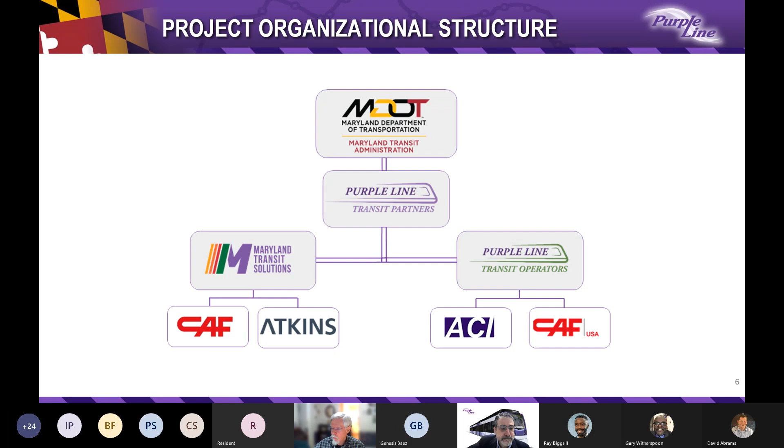Well, let's go to the next slide and take a look at the revised project schedule.

The new design build contract was executed in April. During the spring, MTS engaged in its mobilization efforts, signing subcontracts, planning field activities, and performing due diligence inspections in the field. MTS construction activities ramped up over the summer, and active Purple Line construction can be seen across the entire alignment, as I'm sure most of you are aware.

With all the work plowing ahead, we look forward to our light rail vehicles starting to arrive at the new Glen Ridge Operations and Maintenance Facility off of Veterans Parkway later this year. The test track area, centered around the Glen Ridge facility, is scheduled for completion in summer 2024, which will kick off a period of intensive local testing, integrated testing, and initial operator training while construction continues elsewhere along the alignment. In winter 2025, construction across the entire alignment will have progressed enough to allow for system-wide testing, full operational training, and the commissioning activities necessary to prove out a safe and ready light rail line.

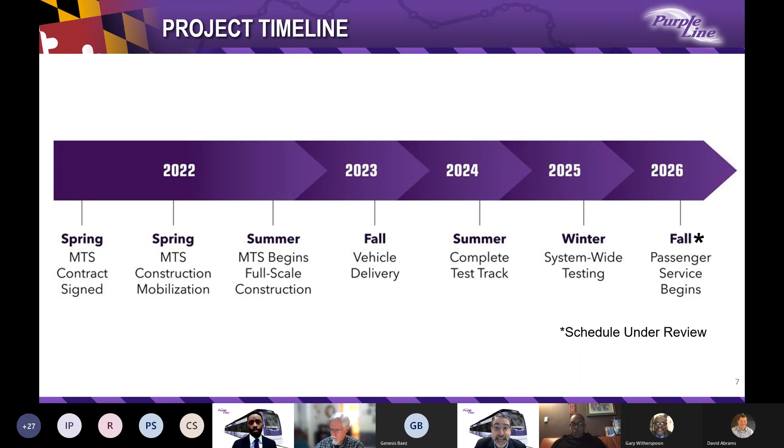With that, I will turn the microphone over now to my project director, Ray Biggs. Some of you may not have met Ray yet, and I'm pleased to have Ray on the team. As project director, Ray is the state's representative responsible for the day-to-day design and construction activities on the Purple Line.

Thank you, Matt. As Gary and Matt mentioned, for this evening we will focus on construction along University Boulevard between the Takoma-Langley and Adelphi Road, UMGC, UMD stations, which includes Riggs Road.

The project will enhance pedestrian safety around each station with ADA-compliant crosswalks and upgraded signals to include pedestrian countdowns, enabling pedestrians to safely cross University Boulevard.

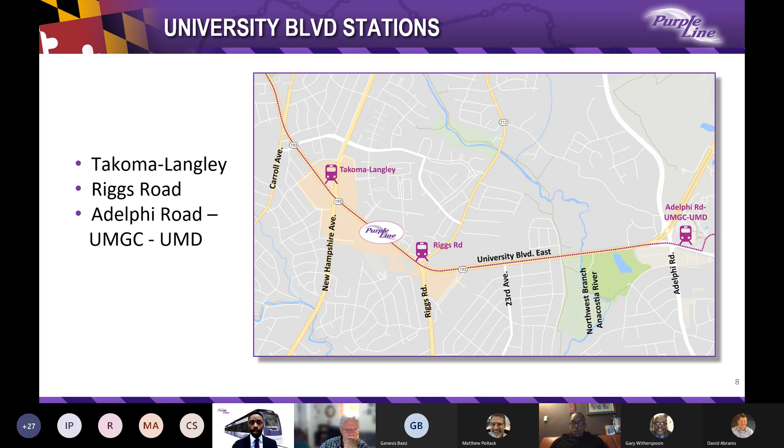Each of our stations will feature unique art installations, benches, trash bins, and message boards providing train arrival and departure information. Over the next few slides, we will show you renderings and designs for each station, as you can see here.

In this segment, you will see a locator map to the left, identifying where the station will be located on University Boulevard. On the right side, this is an engineering plan that highlights design features about the station, including the lighting, shelters, catenary pole location, and fencing surrounding the station.

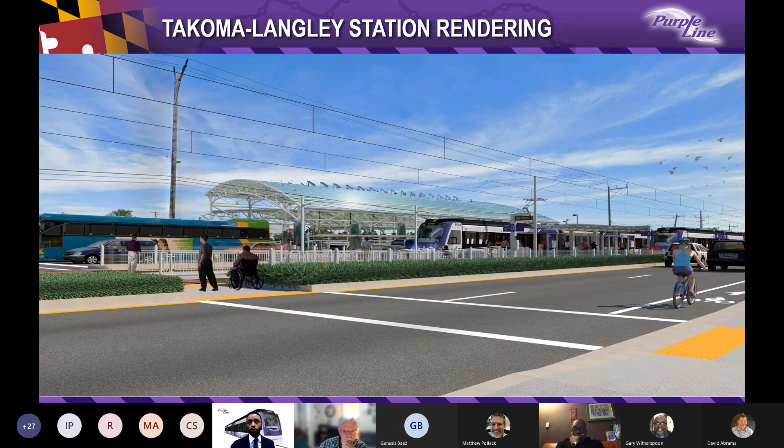Moving on to the Takoma-Langley station, across from Takoma-Langley Transit Center, just west of New Hampshire Avenue. This rendering shows you where that transit center is. This station allows riders to have easy access to the transit hub, connecting riders to local and regional bus services or shopping at the diverse options of shops and restaurants in the area.

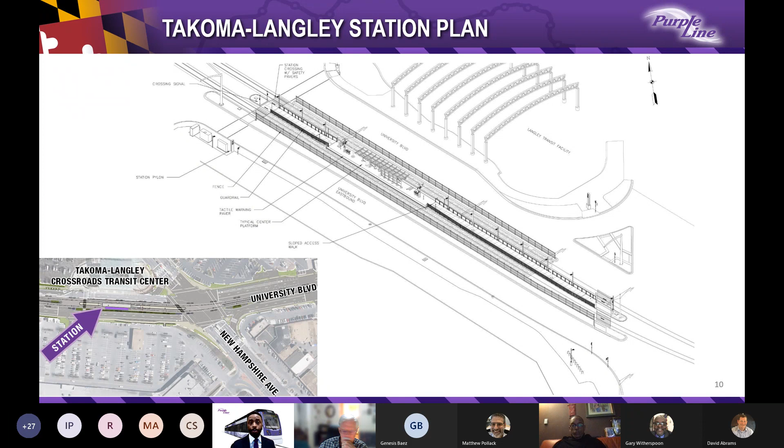Moving on to the next slide. Each of these three stations will be center platforms, meaning our alignment runs down the center of University Boulevard. Because of this, you will hear about our plans to widen the roadway to make room for the light rail and center lanes in our upcoming work. This slide features the details for Takoma-Langley Station.

This rendering shows what a center platform station will look like, typical along the alignment. You'll notice the station shelter is in the middle with train tracks on either side, while the area around the rendering shows grass. University Boulevard will be the roadway with sidewalks on either side of the station, not the grass area on the right side of the rendering.

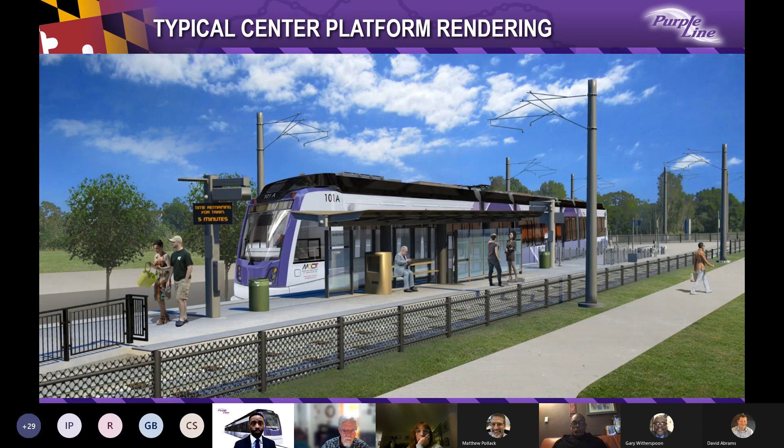That brings us to the Riggs Road station, which is just west of Riggs Road on University Boulevard, with plenty of shopping opportunities and communities off University Boulevard.

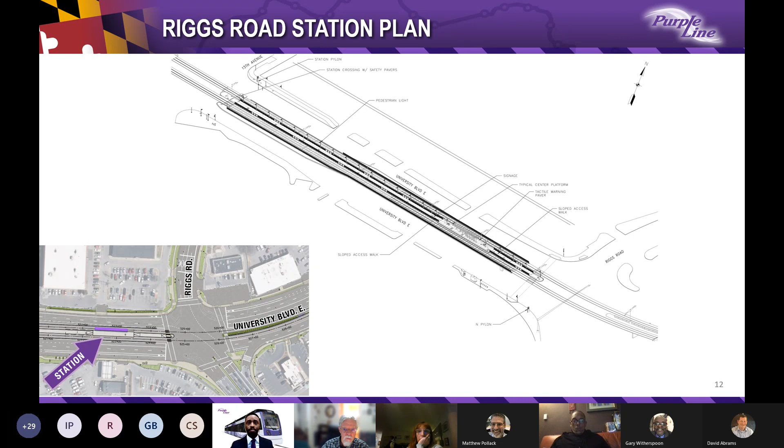The Adelphi Road UMGC UMD station is one of the 5 stations where University of Maryland faculty and students will be able to ride for free. This station is located at the western point of Campus Drive, adjacent to Adelphi Road. Riders will be able to walk to residential communities, the University of Maryland Global Campus, or continue to University of Maryland from this stop. Now we'll turn it over to Yago Pernas, the construction manager for this area.

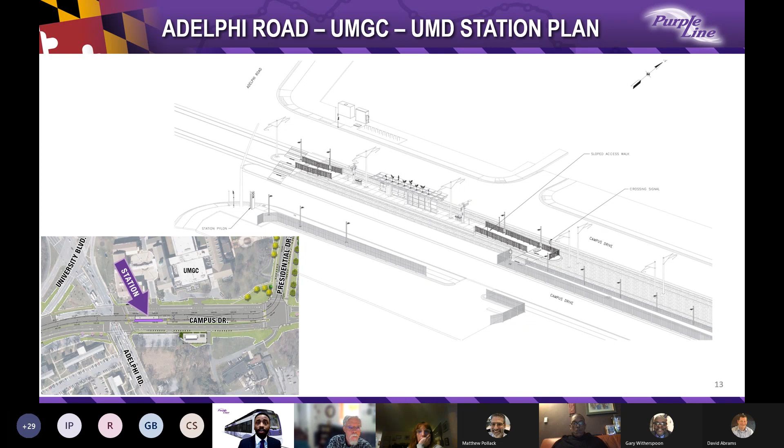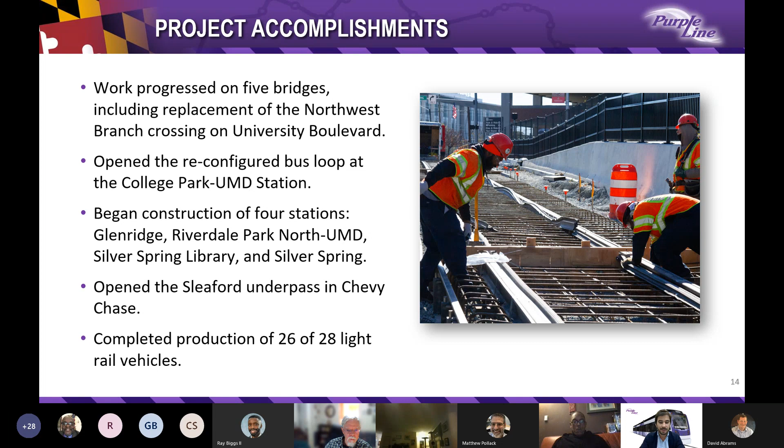Thank you, Ray. Good evening, everyone. My name is Iago Pernas. I'm the construction manager for University Boulevard, and I'm going to give you an update about the main areas we're working on. Before starting, on the screen you can see the project accomplishments we did in the last months, and in the next slide we'll talk specifically about the construction update.

So we are dividing University Boulevard into 3 areas. The first area is between Piney Branch Road and New Hampshire Avenue. In this area, we completed the relocation of the gas and electrical utilities. We are also working on the relocation of the water lines, the sewer lines, and the telecommunications, and we started the installation of the new storm drain system. For the next months, we'll continue working on the storm drain system, then continue with the roadway widening, including the reconstruction of the curb and the existing sidewalk.

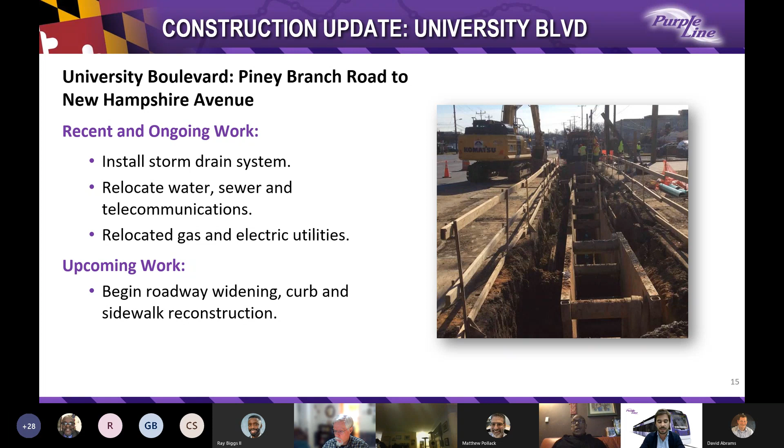In the next area, between New Hampshire and Riggs Road, we also completed the relocation of the gas and electrical utilities. We are also working on the relocation of the water, sewer, and telecommunication lines, and we have been able to start, in this complicated area, the installation of the new storm drain system. In the next months, we're gonna continue laying new pipe, setting new drainage structures, and as soon as we're done with the drainage, we'll continue with the widening, removing the existing curb and sidewalk, and building the new ones. Important in this area, we'll be moving the telecommunication lines from the existing poles to the new poles. After having these lines relocated, we'll be able to remove the old poles, and this will allow us to complete the roadway widening.

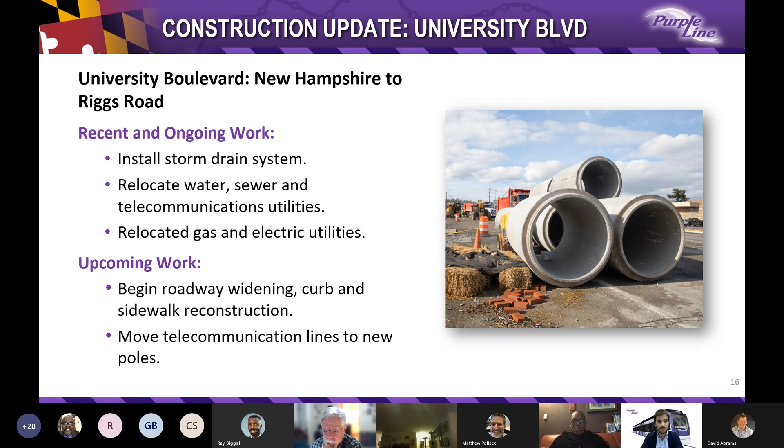In the last area, between Riggs Road and Adelphi Road, we completed the relocation of the gas and electrical utilities, also working on the water, sewer, and telecommunications utilities, and actively installing the new storm drain system. In all three areas, we have every day, on average, 5 different crews working on drainage. As a reference, as of now, we've installed more than 3,000 linear feet of new drainage on University Boulevard. This means more than 12% of the drainage we have to install there.

In the next 6 months, we'll continue working hard on that drainage and on the new sidewalk and curb. In this particular area, we're focused on the service road between 23rd and West Park Drive. We're almost completed there, and in a few weeks, 3, 4, 5 weeks, no more than that, we'll be completing that area, and we'll be impacting temporarily, for 1 or 2 nights, the intersection between West Park Drive and University Boulevard. Obviously, we'll communicate this in advance, and we'll make the community aware about any potential detour we need to implement to perform our works.

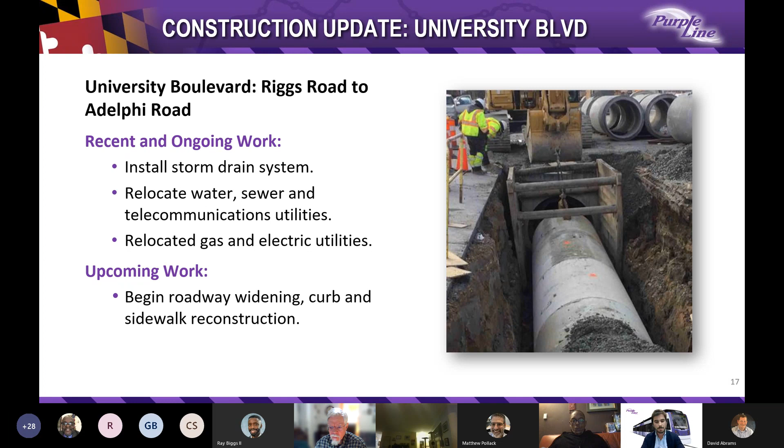Continuing with the next slide, and in the same area, we'd like to give you an update about the Northwest Branch Bridge.

Last November, we were able to implement a long-term traffic shift here, allowing us to push traffic to the north and start demolition of the existing bridge in the south. This demolition is ongoing, and we plan to complete it in the next few weeks. Then we'll start construction of the new bridge, including new foundations, abutments, columns, and deck. As soon as the new bridge is completed, we'll be able to reopen traffic in the south.

Having 2 lanes in the north and another 2 lanes in the south, letting us work in the median for the train itself.

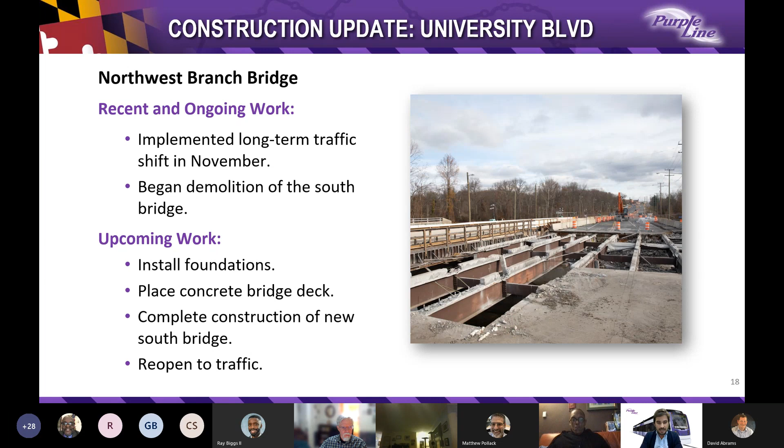In this last slide, I'm going to talk about the service road impacts. We are dividing the service roads into 2 main groups.

The first group is the service roads where we have temporary parking restrictions. You can see these areas highlighted in yellow, specifically between 23rd Avenue and West Park Drive, where we are working right now, and the other area between Carroll Avenue and New Hampshire Avenue on the north side. As soon as we complete the work in these areas, we'll remove all restrictions and recover all the parking spots there.

However, in the second group, we have two service roads where the parking spots will be eliminated permanently: New Hampshire Avenue to 15th Avenue on the north side, and from Carroll Avenue to New Hampshire Avenue on the south side. In these areas, as soon as we complete the drainage works, we'll focus on widening, including the permanent removal of the parking spots.

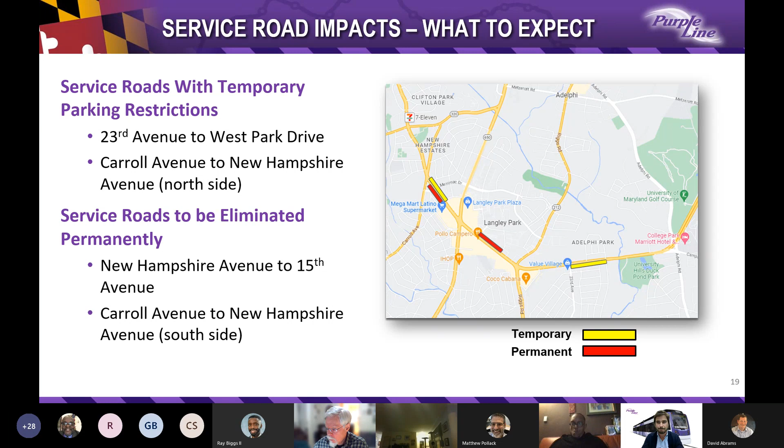Hello, everyone. Just to touch base on our community outreach and business outreach, we continue to meet with the community and stakeholders, and we are regularly meeting with impacted businesses. We do a project newsletter — I think the newest edition was placed online this morning.

Good evening, this is Joe Vallecina reporting from Adelphi, Maryland, calling in. Hi, thank you for joining us. Do you mind putting your microphone on mute? Thank you.

I did see that somebody asked how you're going to receive construction notifications about road closures. Through our website, you can log on and subscribe to those, and get them via text or email, or just log on to the website and look at those if you don't want anything coming to your phone. We'll share that link at the end of the presentation. If you don't currently receive those, we highly recommend signing up, because that's how you'll get proactive notices about road closures, lane closures, and night and weekend work upcoming for the project.

And obviously we host community advisory teams, as we are doing right now. Next slide, please.

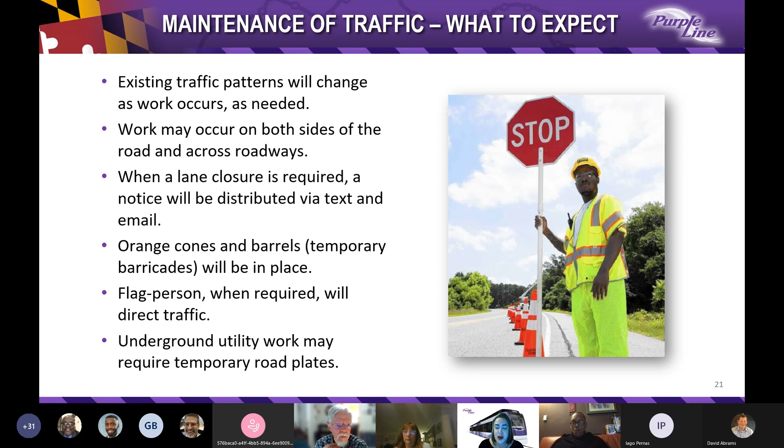Back to maintenance of traffic — as you're traversing the project site and going through work zones, please be alert, and don't be on your cell phone. Cones, barrels, and sometimes metal plates where we're doing excavation will be there. If you see anything that looks off, please let us know and we'll immediately address it. We are working to keep pedestrian access safe and open on either the north or south side, as we do have to shut sidewalks sometimes; those detours will be announced in our notifications as well, so definitely sign up for those. That's maintenance of traffic in a nutshell. I'll turn it back over to Gary, and thank you guys for joining us tonight.

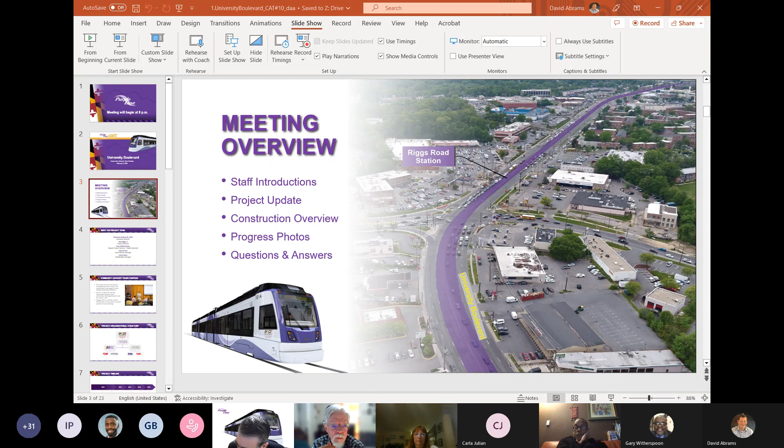Okay. I am happy to try and answer them as well as I can live, but if we have any additional information, we will follow up in the written responses going forward. I wrote as fast as I could. I think the first question had to do with what was being referred to as a deficit gap.

A deficit gap would imply that we don't have the budget to continue the project. We do have the budget. The state has committed to paying for this out of the Transportation Trust Fund, so the project will be paid by the Transportation Trust Fund. Next question is that it appears there are unacceptable delays.